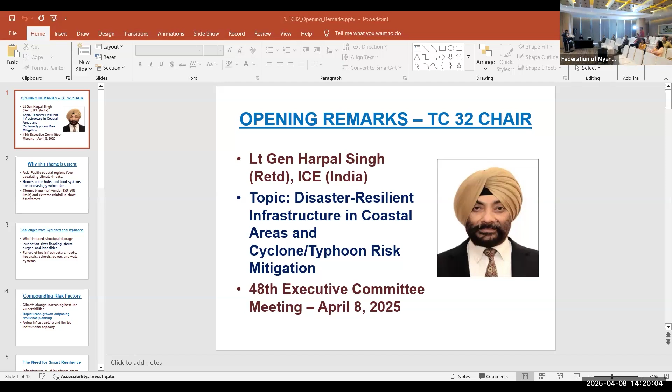I think I'll first invite Professor Murthy, who has already joined us. Sir, have you joined us? Yes, General Sahab, I am in. Hello, General Sahab, can you hear me? Yes sir, I can hear you. Let's start the presentation. Can you see the screen? Yes, we can see your screen.

Thank you. Good afternoon, ladies and gentlemen. A pleasure to be part of this panel discussion related to cyclone resilience. I'm keen to present the highlights of what we need to do differently from what we have been doing all these years. So quickly, today's presentation will be about the double trouble that cyclones offer us, which is both wind and water, then the need for robust standards, and finally we'll talk about the way forward, what we need to do.

But in all this, the backdrop for building resilience in the built environment and thereby in the communities are robust standards and a strong techno-legal regime implementation. These will remain our key watchwords for the way forward.

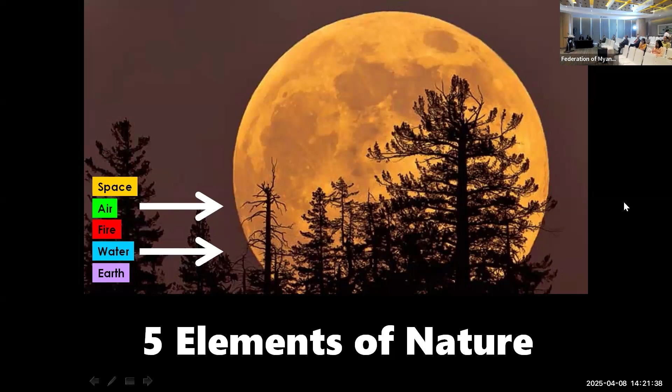First off, let us talk about the double trouble that we have. Nature has 5 elements in it, and cyclone takes the fury of 2 of them simultaneously. Very unusual. Normally in design practice, only one is expected at a time in the design process - that is the assumption made. But cyclone brings a very special combination of wanting to design for 2 simultaneously. And when you look at the loads that appear on the structure, the wind and the water loads, both are force loads, and hence there is a need to build robust standards.

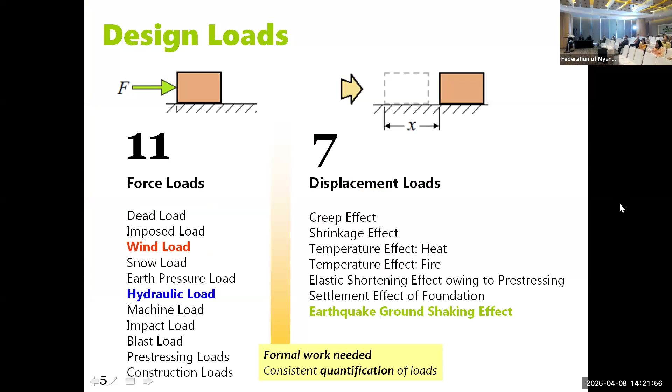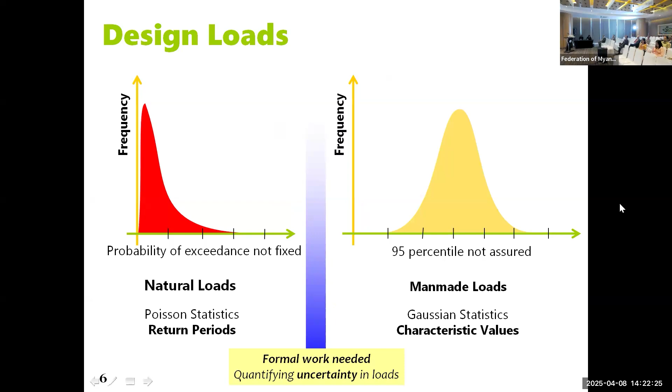I'll explain why these robust standards have to be done. Now, the loads group under natural and man-made loads, and natural hazards are seen to follow Poisson statistics, while man-made hazards follow Gaussian statistics. And hence, in the last couple of decades, we have moved to estimating natural hazards based on return periods and not on characteristic values or Gaussian statistics.

For example, this has been successfully implemented in the case of earthquake design, where we have categorized all our built environment into normal, important, critical, and special structures. Return period forms the basis - the larger the return period, the more severe is the consideration of the force. And that is the approach that we have been taking.

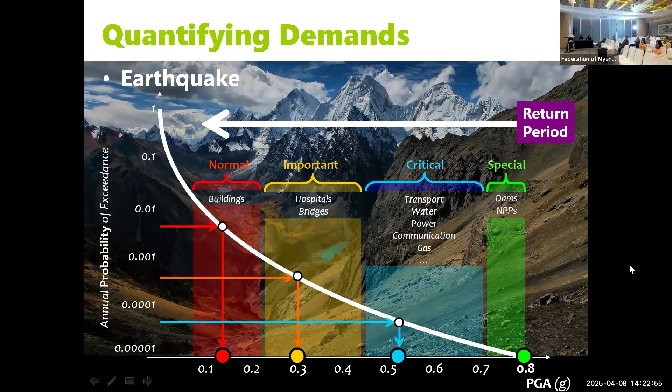It is now time for us to look at the second segment of our discussion today - the robust standards that we have, how do we really create such robust standards? So first off, in the case of flood also, we will need to look at the 4 sets of structures - normal, important, critical, and special - and then look at the flood levels that we need to consider in the design of such structures.

Why is this necessary for us? Because first off, in the existing built environment and also the new one to be added, we need to assess the risk that the built structures are at from the consideration of flood. And hence, we need to move to a probabilistic framework. While some countries have done this successfully, many of us still have not moved to that, because of the lack of data availability in a formal sense.

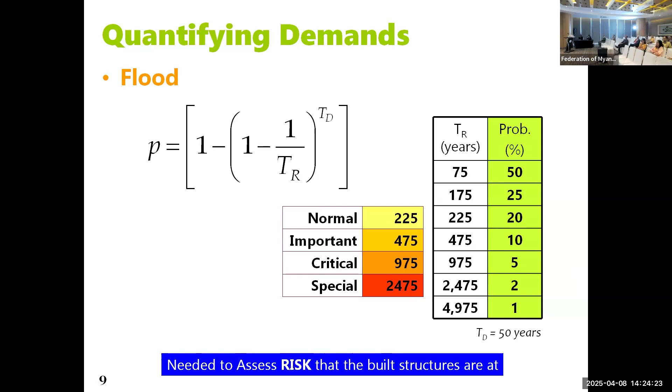Because in the case of flood and wind, we need to worry about local conditions, so this database needs to be maintained consistently. Internationally, the probabilities acceptable for the design of normal, important, critical, special structures range from 20% probability of exceedance in the 50-year design life, to 10, to 5, to 2 years, 2% probability of exceedance. Now, in the case of flood, a new paradigm has come into our discussion - that is climate change.

If you consider climate change, the surprise will be much higher, and hence it is time for us to bring that into the design process.

The increase in the incremental water level as you go from the return periods of 225 years forward is to be examined. In the case of earthquakes, the best available estimate based on paleoseismology and fault movements over past earthquakes has been slated as 2,500 years. But in the case of flood, the best available data is not more than 200 years, and hence that becomes the reference return period, and anything higher than that is actually to be estimated.

Now, we can look at the way we are designing right now and revise that method from mere statistics to a return period approach, and also add a climate change factor on top of that. This would be a simpler method of handling the hazard level as far as flood is concerned.

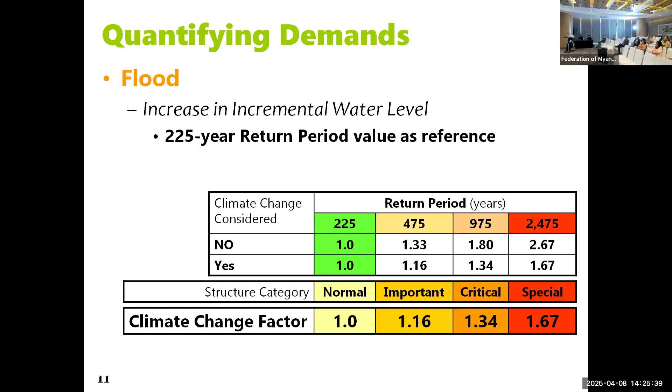Now, when it comes to wind, many countries have also moved to the return period method, but many others are yet to have this step taken. So it is time to again harmonize the wind estimation of the wind forces also under the same return period concept. That's on the demand side.

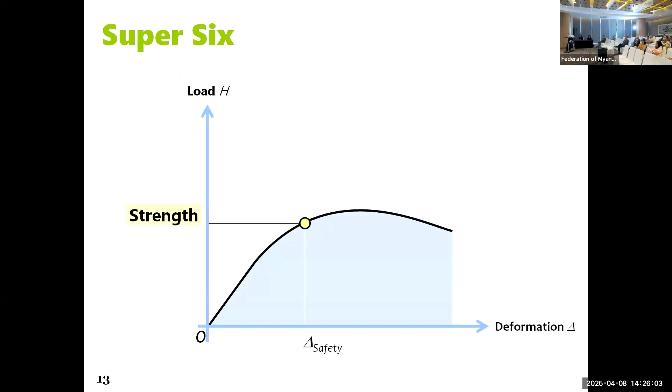On the capacity side, when you design structures, you design normally for strength, and then you have serviceability, durability, robustness, integrity, and restorability as the six limiting states that we have to design for. In sequence, we look at strength design first, serviceability next, durability is considered en route, and then we have robustness, integrity, and restorability in that order.

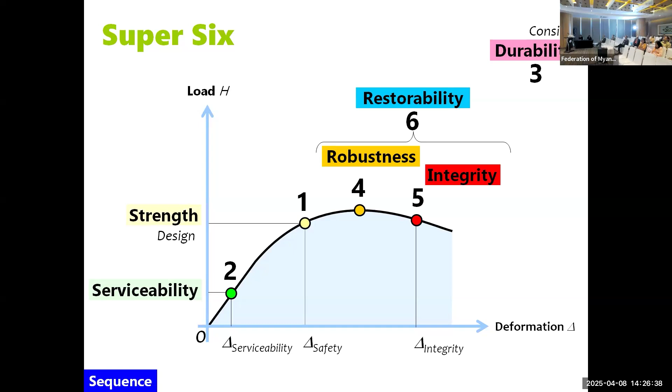Not all structures need to be designed for all six of these, but for sure the first three are mandatory for all structures. So while we design for strength, we will consider durability and check for the others. That is the approach that is taken.

Now, when you look at such a design framework, you notice that as you permit more damage in the structure, you're increasing risk. And as you reduce the damage, you're increasing resilience. And this is where we need to make a departure now.

All these years, we were rather accepting the amount of risk, putting numbers into it and saying this is the level of risk, this is acceptable, and so on. But now I think we need to depart from that, because we can't keep rebuilding all these facilities over and over again, especially in the case of cyclones, where we are looking at annual recurrence.

We need to have resilience built in, which means the design standards have to change now from a risk-based approach to a resilience-based approach. So that's where the robustness of the design standards comes into picture.

When you look at life cost, it might seem like it's going to cost a little more, but when you look at the life cycle cost, even the risk-based design is also going to cost more. There is a kind of an optimum in between that we can start with initially, instead of going whole hog to complete resilience, and then slowly tighten the clauses as we go forward in each 5-year or 3-year window. We can improve the clauses and finally have a destination of complete resilience.

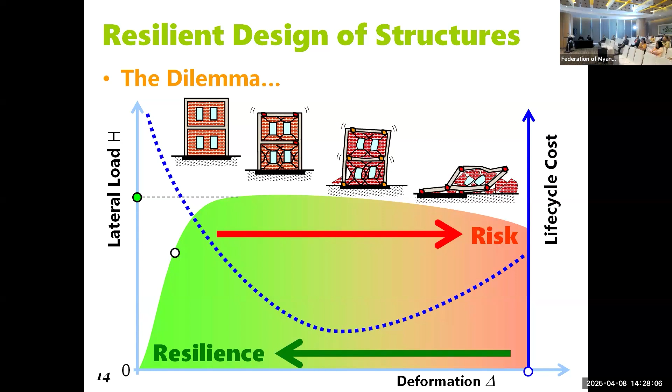This would be my recommendation for the annually recurring loads that we have, like in the case of cyclone. So on one side, the loading standards, we need to improve the hazard estimate by bringing in probability. On the other side, the design standards, we need to improve the robustness by examining the structural capacity and estimating the amount of damage.

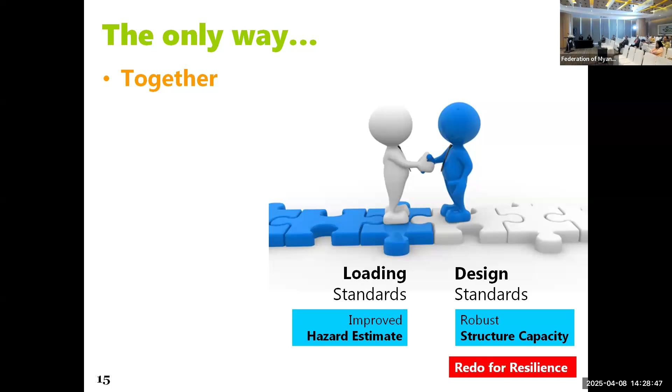That is essential at this point of time if you want to bring back the importance of dignity to mankind in terms of the flooding that is happening regularly. So it is time to redo the design standards to build resilience into that. It's not the same as the risk-based design. And so we need to think together and then create this.

Finally, I would like to say that in the past, we have always been focusing on risk, and we say we have three elements contributing to risk: hazard, vulnerability, and exposure. Hazard, we use science to estimate. Vulnerability, we use engineering to estimate. But exposure is still in the hands of the municipal bodies through the bylaws.

And so structural safety was hinging also on the bylaws that were allowing a lot of freedom to certain structures being developed in vulnerable areas. This is where I think we need to put some pressure on trying to relook at the bylaws, improving the engineering estimates, as well as improving our understanding of the science of cyclones.

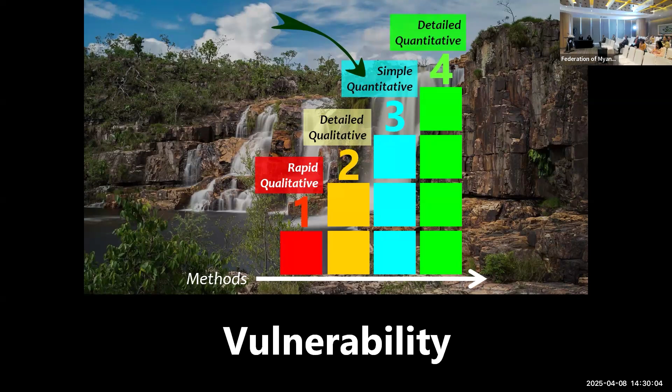On the risk side, vulnerability assessment forms the backbone of risk assessment, and this can be performed at four different levels. The first two are qualitative and the second two are quantitative. It is necessary now for us to move to quantitative assessment and can't survive on qualitative assessments anymore. Vulnerability assessment has to go into bringing out exact numbers and exact deficiencies in structures.

But you would notice that you won't do the entire building stock at all the rigorous level. You will start a telescopic method. You will pass all structures through level 1, low rigor and low time taking, then bring level 2, which is also qualitative, then bring level 3, which is quantitative but simplified, and then bring the detailed quantitative.

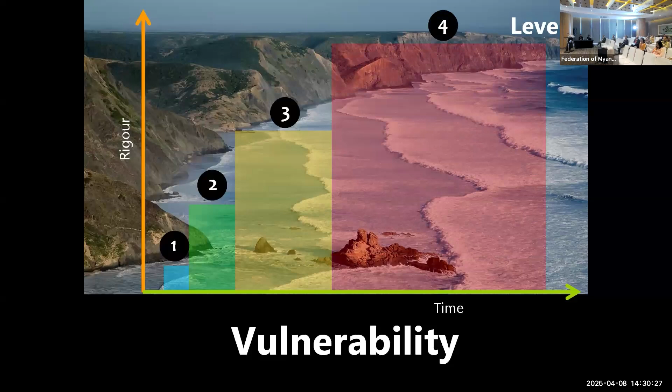It so happens that if you look at the number of structures that will go through this filter, if you start with 5,000 at level 1, finally you'll end up at 5 structures to go to level 4. So it is not so bad when you look at 50 structures to be evaluated quantitatively out of the 5,000 through a logical sequence of filtering. So it seems that the problem may seem large, but it is still doable by the engineering and architecture community worldwide.

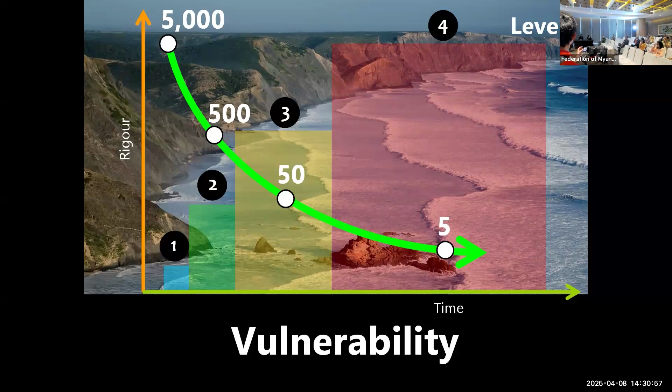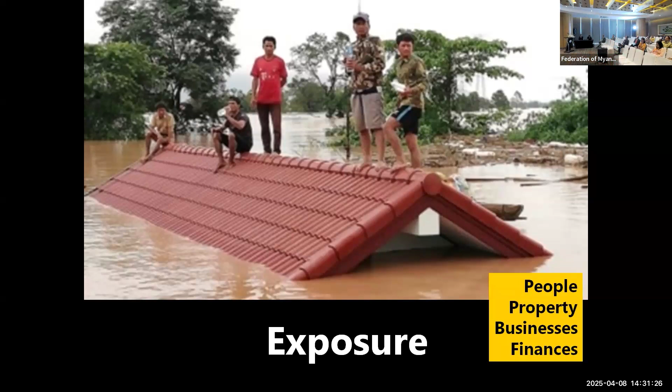But one thing that embarrasses us is when you look at flood, this has been the most painful question: should we allow people to go through this process every year, every time there is a cyclone or every time there is a high flood condition? I think it is time for us to give dignity to mankind. Even though we have been talking about people, property, and business and finances as far as numbers are concerned, I think mankind has to be put higher.

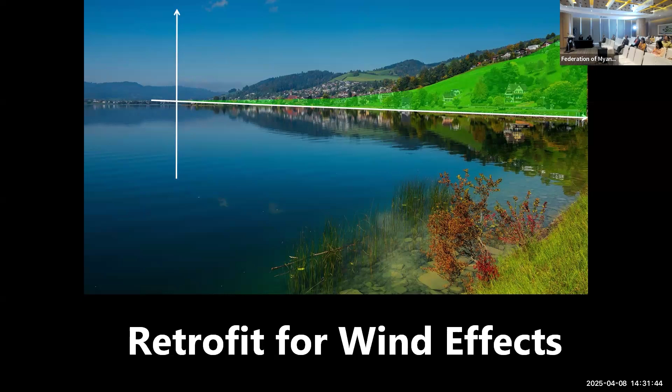Now, out of the two hazards that we have, one is flood and the second one is wind. We notice that retrofit can be done only for wind-related systems. And while all new structures will have to be built with the revised standards, the old structures also, we need to now reduce the number of vulnerable structures and then increase our building stock towards safety rather than leaving them at the unsafe conditions.

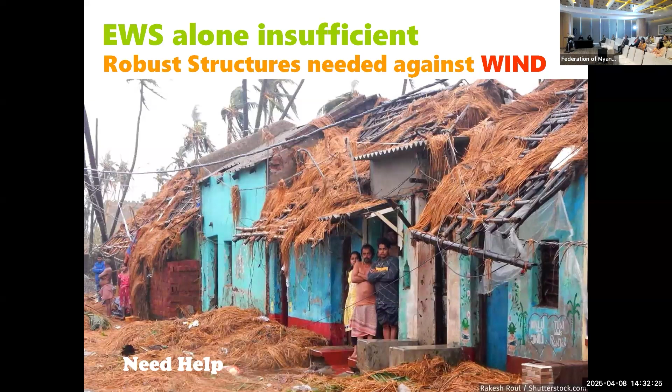So this is a very difficult task. Retrofit is not easy, but I think we have to be systematically doing this through prioritization of our assets into 3 boxes: high risk, medium risk, and low risk. What we notice is robustness of structures is needed against wind. Wind knows nothing other than the fact that is the structure able to resist the level of pressures that it is imposing on structures. If it is not, then I think there's definitely need for help on our structures.

Also, how long will we keep on doing response? And how long will we keep evacuating people? At some point of time, we are clear that the people are not alone, but they are lonely because the technical bodies are not giving them clear statements. I think we need to support governments by giving them very precise statements as to what is doable and what is not doable.

I will close by saying that flood knows only elevation and wind knows only obstruction. As far as flood is concerned, we need to live above that high flood level, and we call this compliant design. And as far as wind is concerned, we need to face it and do the defiant design. Clearly, flood is a planning matter and wind is a structural design matter.

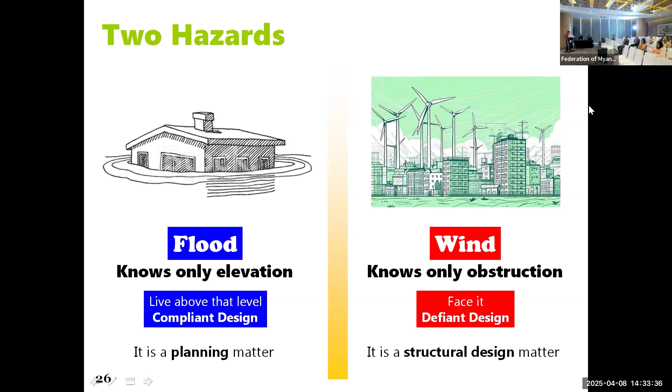So what we need is actually robust standards that we can collectively, through all the membership of the ACECC, coming together and creating with the best practices across the countries, and also get governments to look at some policy matters related to planning, land use planning for the future developments.

So I'll put the strategies in 2 boxes. One is short term. As far as wind is concerned, we need unified good engineering design practice related to the built environment, improve the standards as far as hazard is concerned, make them robust, improve the design part of it, where especially when we look at resilience, it is not possible for us to now admit so much of damage in our structures. And so for wind particularly, the structural configuration of structures also makes a big difference.

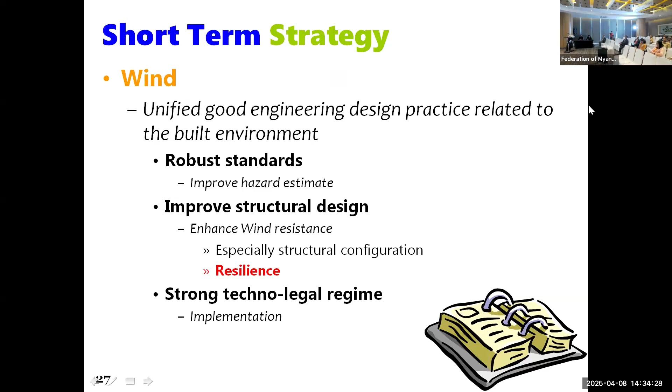Very clearly, where we are falling short in many countries is actually strong techno-legal regime. We are not implementing the standards that we are creating. Even whatever is available, we are not implementing. And that is why we are jeopardizing a lot of people living in low-lying areas and living in structures that are vulnerable to wind action.

On the flood side, the focus should be on mitigation and not on preparedness and response. As far as mitigation is concerned, we need land use planning, and we need to, in the long run, move people out of the low-lying areas because water knows nothing other than elevation.

On the other side, we will have to painfully go through the process of preparedness and response because we have a large stock of buildings and structures in low-lying areas. So we need to forecast, we need to do early warning, and we need to do evacuation.

But all this is out of compulsion. This is not the solution in the long run. The solution will remain only on the mitigation side. This is where I think a strong policy is required. We need to help governments understand the importance of bringing back dignity to mankind by giving them an advantage.

So it's very clear to us that there are a number of countries which have very good practices, and we want to borrow all those good practices and put together a considered document which can become a model document for countries to adopt and adapt and even customize it to their conditions.

But it is time that a body like the ACECC comes together and creates this necessary backdrop. It's not time to watch anymore, it's time to get into action. With about 20 people on the floor in the stadium and 20,000 watching them, I think we need to reverse it. Only the elderly should be watching. All of us should be continuing to play the game.

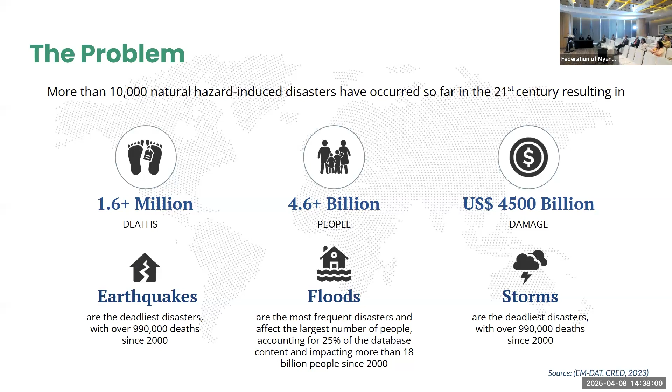Although Nepal is not that much affected by coastal problems, we do have a number of hazards posing significant risk, and we are all aware about the natural hazard induced disasters that have been severely affecting us, so I won't go much into this. Besides, if I have to talk about the floodings in Nepal, if you look at the 50 years average of data, you get to see that on average there is at least 83 deaths per year. This is based on our historical data, and it's not just about the lives, but also the damages and losses in different sectors that we have been continuously facing.

Apart from that, one of the specialities of Nepal is the complex geography. If you look at the elevation difference of Nepal, the Tarai, the southern part of the country, is around 60 meters of elevation, whereas the topmost northern part is almost up to 8,848.86 meters. So within just a variation of 200 kilometers of aerial distance between the northern and southern parts, the elevation varies by a big number. Besides, the complex geology and other problems have also been resulting in this kind of issues.

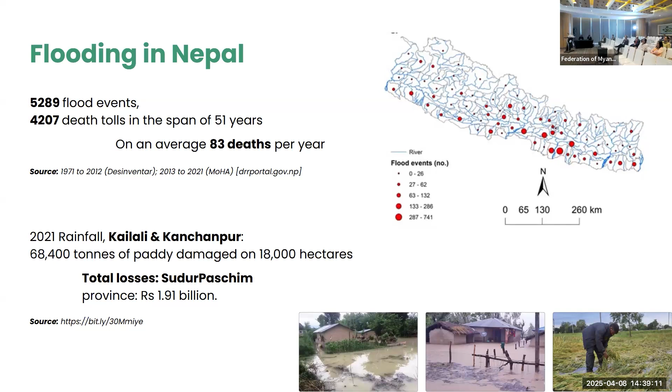And regarding the floods, I already shared this. So what's the problem we are facing right at this moment? People often call it a lack of data, but it is not just the data, but also the approaches we have been following, and also regarding some of the work that is more focused on response rather than being very proactive, investing in mitigation and also preparedness.

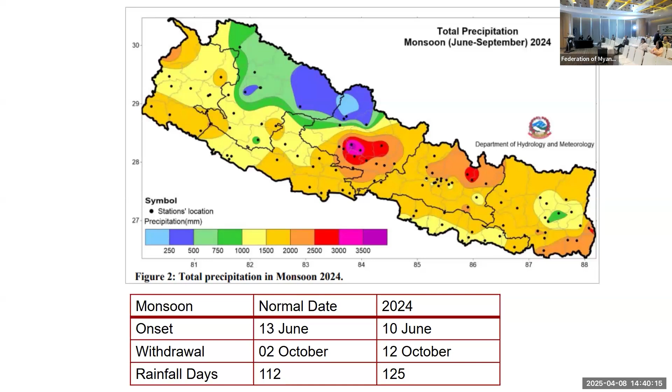Today I'll be talking about one of the case studies from the far western part of the country. It was kind of 5 days before my wedding when I was set to leave, but then because of this emergency, I had to return back to work regardless of my wedding ceremony.

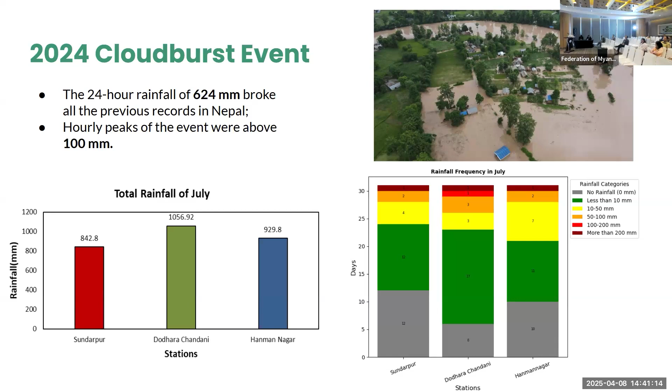Between July 7 and July 8, for a period of around 24 hours, there was almost 624 millimeters of rainfall. If you look at the rainfall of July month in that region, the total monthly rainfall was around 1056 millimeters, but on just one day it was around 624 millimeters. This speaks to the massive amount of rainfall, which happened because of the interaction between the monsoon rain that comes from the Bay of Bengal and also some western disturbances. So there was a local system that resulted in this kind of 624 millimeters of rainfall.

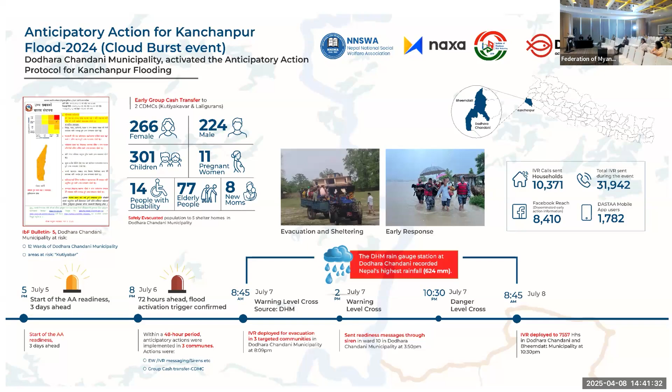Today I will be sharing how we were able to evacuate 266 female and 224 male prior to this event, though we had very little lead time, and also some of the strategies that we adopted during this monsoon. So how we intervened is first through our technologies.

The region I'm presenting is transboundary in nature - only 35% of the catchment area lies in Nepal, whereas 65% of the area lies in India. So there are some limitations in data, but based on the available data and under different return period scenarios, we identified what areas could have some kind of inundation. So we developed a model.

Household surveys were also carried out, and the house typology, vulnerability components, and exposure were explored. Based on that, we categorized the households by overlaying the layers of hazards, vulnerability, and exposure, and identified the households which had persons with disability or other vulnerable people. That kind of information was already available with the municipality, and we had this visualization available in the municipality.

Because we lacked data, we also developed an inundation model, and then we checked it with the historical inundation that happened in the past. So this is how we validated our models.

For quick response - not just response, but for early action and early evacuation - we had community-led plaques in households, where households with severe vulnerability were provided with such plaques and information.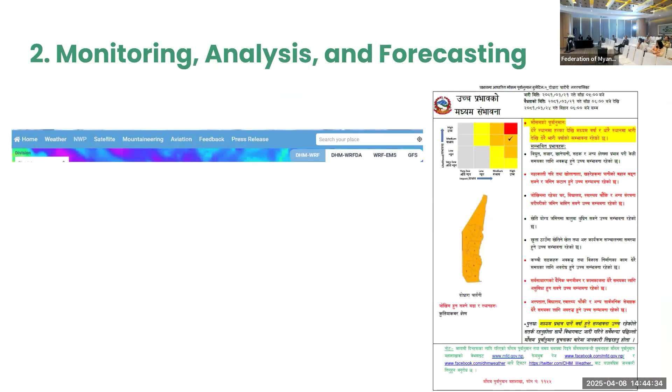We also worked with the Department of Hydrology and Meteorology, doing a piloting of impact-based weather forecasting this year. Before that cloudburst event, about 2 days prior, we were provided with this IBF bulletin that suggested there could be severe problems. That's how we started working in the field.

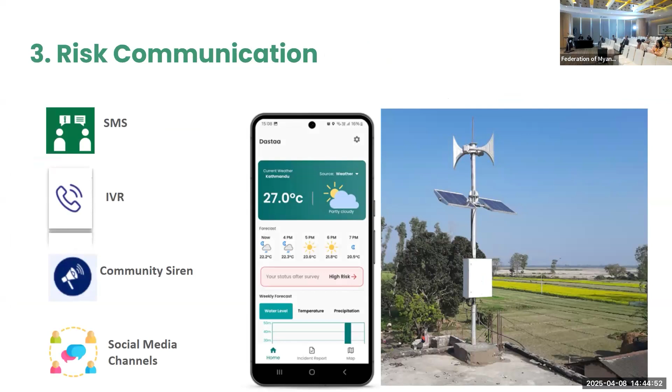With the help of SMS, IVRs, community sirens, and social media channels, we communicated with all households to keep them in safer areas. We also have community disaster management committees.

During this period, we sent many IVR messages to their phones to check on their conditions, whether they had already evacuated or not, and also to notify people in advance.

And besides, we also developed youth groups who were very active and contributed in the overall disaster risk reduction cycle. Some of the youths were trained on what kind of interventions they need to do. The early actions included evacuations, group cash transfers to facilitate persons who evacuated to shelter homes, and also cash voucher assistance.

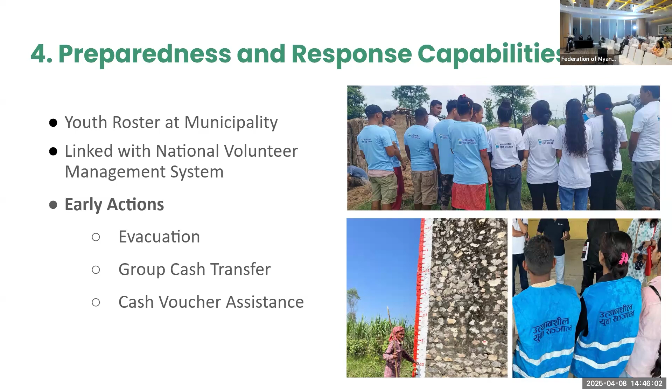Besides, we also promoted some community-based mechanisms. The staff gauges painted on different structures were also made available to the communities. The municipality also developed early action protocols, so whenever there is likelihood of a potential event, those protocols are activated, and all stakeholders are assigned their designated roles and responsibilities. Before any such event happens, people would take early action to reduce casualties or other losses.

After the floods, our volunteers also went to different areas, and based on the inundation level and damages that occurred in the region, we are currently developing a depth-damage curve for this region, and also developing a physical vulnerability curve.

Besides that, the community was also really proactive, and they used to send us any kind of incidents that occurred in the region. For instance, if there were disturbances on the road or a bridge had collapsed, they would send that data to the municipality for proactive response. This is how the community also worked hand in hand.

Together we worked on the four pillars of early warning systems: disaster risk knowledge, disaster warning dissemination, preparedness and response, and observations. Overall, what I want to share is that because of these interventions, everything was linked together.

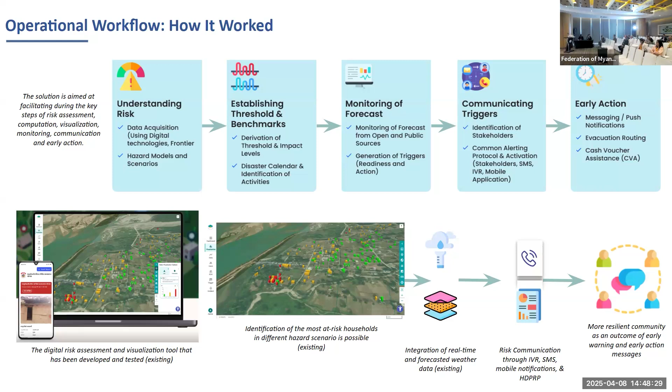And thus, despite having around 1,300 lives lost during 1993, for this year 2024, especially in Dodhara Chandani, because we were able to apply these interventions, there were no casualties.

So there are a few lessons learned that we gathered during this implementation process. The most important part is transboundary collaboration, because disasters do not just look after administrative boundaries. And what is also very essential is...

We are kind of living in risk, so we are actually adapting to the situations. There are instances where we can also apply mitigation, but there is a term called residual risk. Despite all the interventions we do, and because of resource constraints, everything is not possible, so residual risk actually remains.

It is our duty to make this residual risk as minimum as possible. It is also very important to work on preparedness, as identified in all the cycles we undergo during our early warning system implementation. The availability of very granular level information will be very important for the government and other stakeholders to carry out interventions prior to disaster.

While implementing this project, we were also awarded grants available from GSMA and ADPC, and we are working with stakeholders under the leadership of the local government.

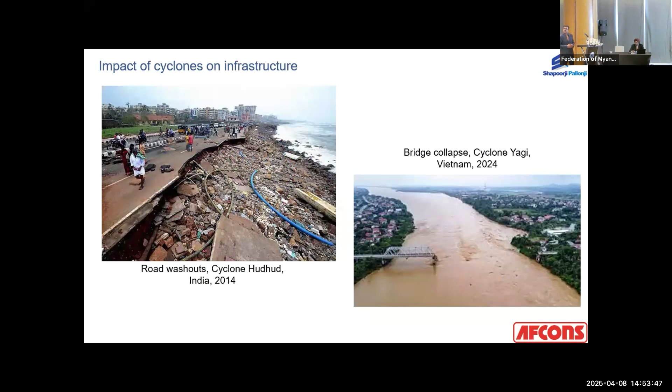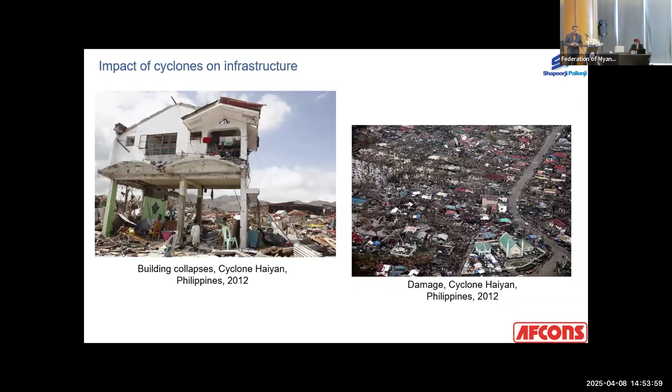The cyclones have a catastrophic effect on the area. It leads to failure of roads, collapse of bridges, collapse of buildings, and leaves a trail of destruction in the entire area where the cyclone hits. Of course, there are many structures which have stood the test of time, and in spite of experiencing many cyclones, have stood tall without any major damage.

We all know that if we want a structure resilient to cyclones, we need to take very good consideration of the wind loading. The design needs to be very aerodynamic, the foundations need to be very robust, there has to be some amount of redundancy in the structural design, and we need very good material for construction.

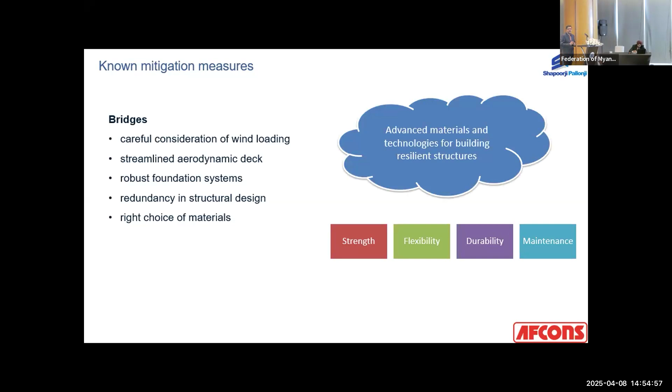Since my topic is about material, I'll throw some light on the use of advanced materials and technology for building resilient structures, with focus on achieving high strength, high flexibility where required, high durability, and low maintenance.

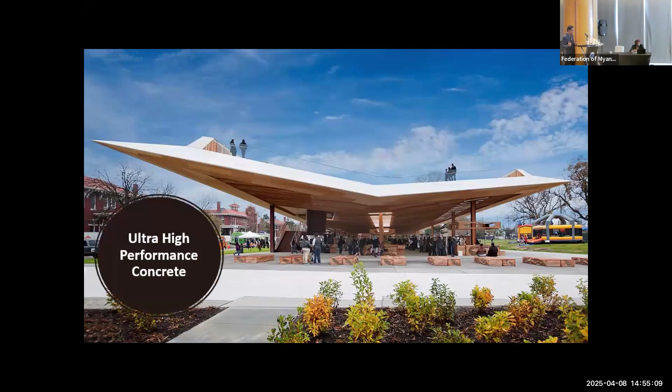One of the most promising technologies is the use of ultra high performance concrete. This concrete not only has very high compressive strength, but also very high flexural strength, very high modulus of elasticity, and very high fracture energy due to uniform distribution of micro steel fibers added into the concrete. The water cement ratios are very low, so permeability is low and durability is very high.

Because of the ultra high strength, the members are very slender, giving a very aerodynamic design. You also have lower dead load, and the structure is very ductile and has very high impact resistance.

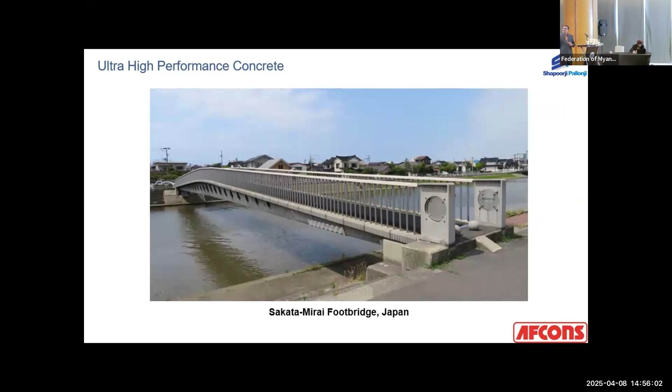This is one of the projects where ultra high performance concrete was used early on. You can see that the members are very slender, and the shape is very aerodynamic.

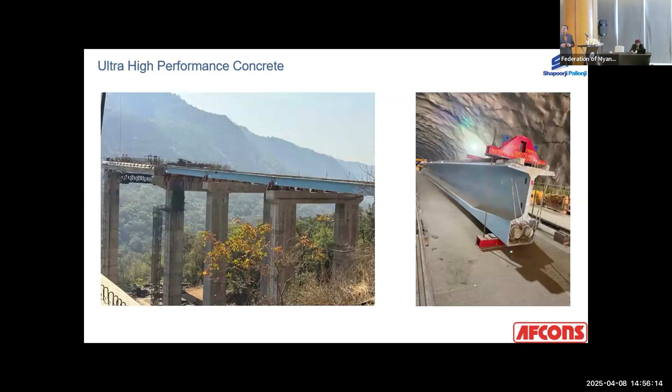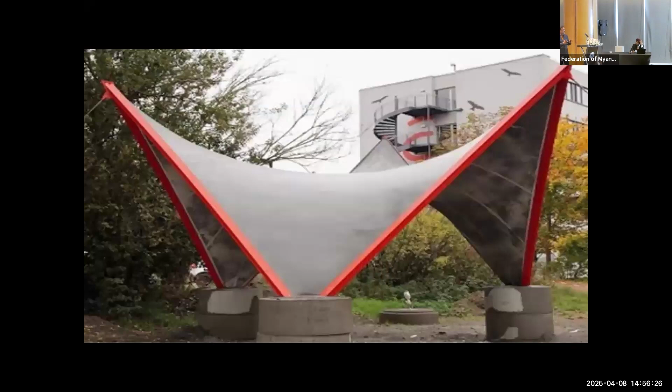Having looked at the concrete technology with very high strength, let us now look at something very flexible, called bendable concrete. Bendable concrete has got very high utility in areas where structures experience high deflection, such as in earthquake and cyclone-prone areas. This concrete can have good utility in place of conventional expansion joints; you can use bendable concrete as a replacement. The bendability comes from using polyvinyl alcohol fibers.

We all know that conventional expansion joints can rust, and if not maintained properly, will not function with optimum life cycle. This can cause additional stresses to develop in the structure. We can use bendable concrete as a replacement for the conventional expansion joint, allowing it to expand and contract across the requirement without requiring major maintenance.

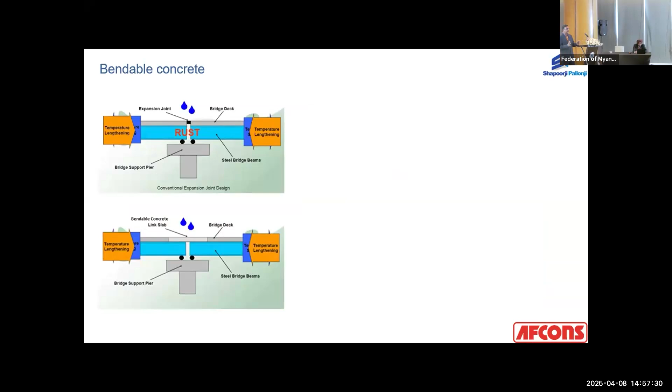The Mihara bridge in Hokkaido, Japan is one such project that was built using bendable concrete instead of conventional expansion joints.

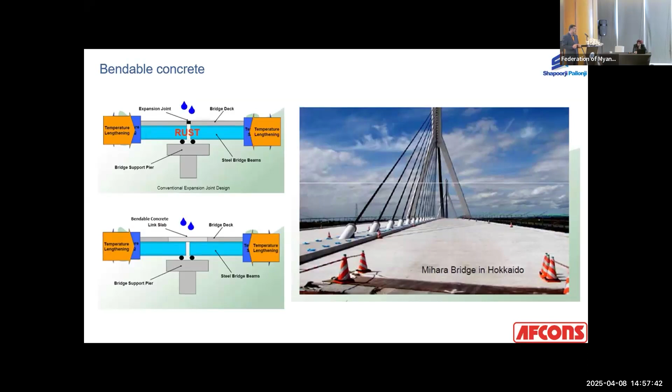We know that when a structure undergoes high deflection, it develops a lot of microcracks. These microcracks are not visible to the naked eye. Over a period of time, they widen, become visible, and then some action for repair is taken.

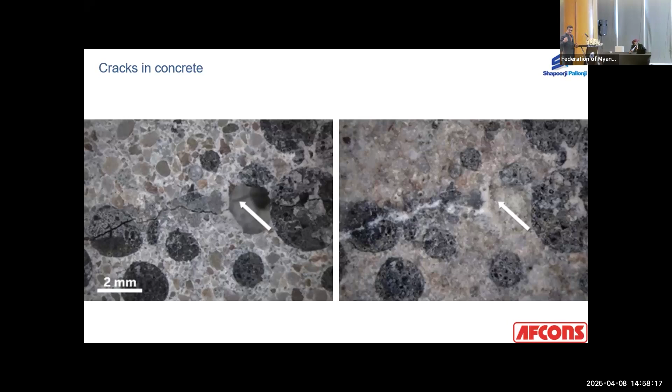Imagine if we have concrete technology, a mechanism by which the minute these microcracks develop, you are able to heal them by some mechanism. If that happens, then the deterioration to the concrete is going to be very low, and the service life of the structure is very high.

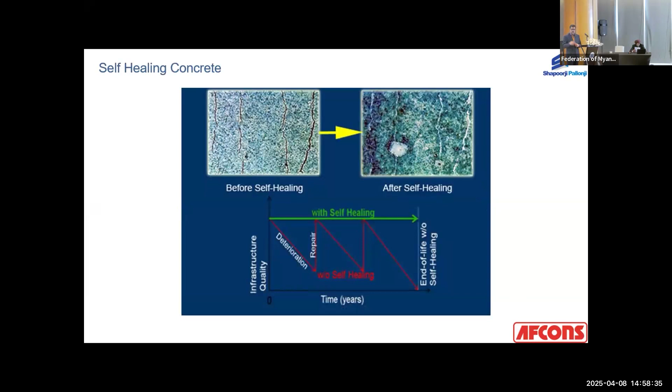There are a couple of ways by which this self-healing mechanism can be built. One is a lot of research going on the use of bacterial concrete. This is a certain kind of bacteria incorporated into the concrete at the time of production, and it remains dormant in the concrete as long as the structure exists.

The minute any micro cracks develop and water gets into it, these bacteria get activated and in the presence of water and oxygen, they produce calcium carbonate, thereby filling the crack at the micro level and reducing deterioration. The other way of achieving self-healing is by using crystalline-based powder.

These not only grow crystals in the pores, capillaries, and microcracks, but also reduce the permeability, thereby increasing the durability of the structure. It acts as self-healing in the water proofing process as well.

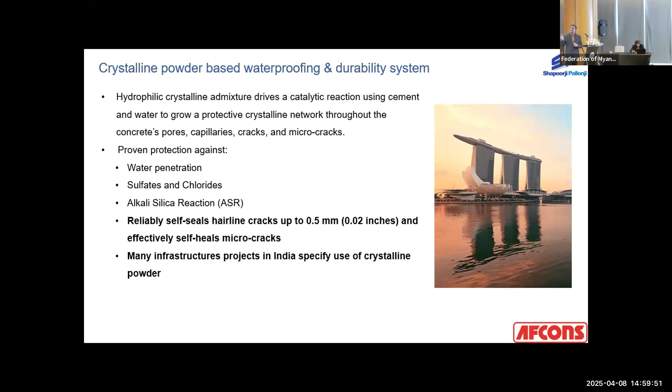Apart from making good concrete, it is also very important that we design the structure in such a way that the rate of corrosion of the reinforcement is controlled. This is especially important in case of RCC.

Similarly, when we compact it, the excess water tries to move out. There is no way to go, so it stays there in the cover zone. Now our cover zone was the first line of defense. If the air provides carbon dioxide into the concrete, this will affect the corrosion.

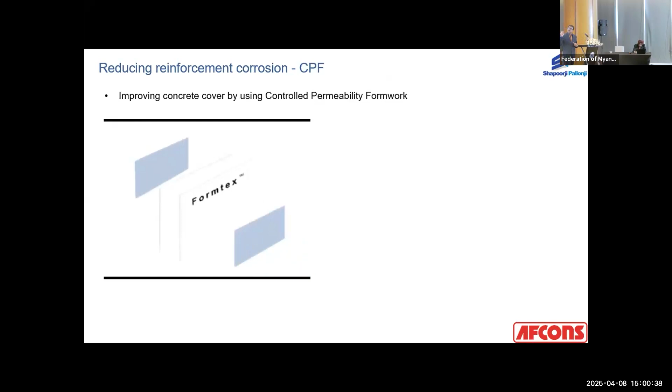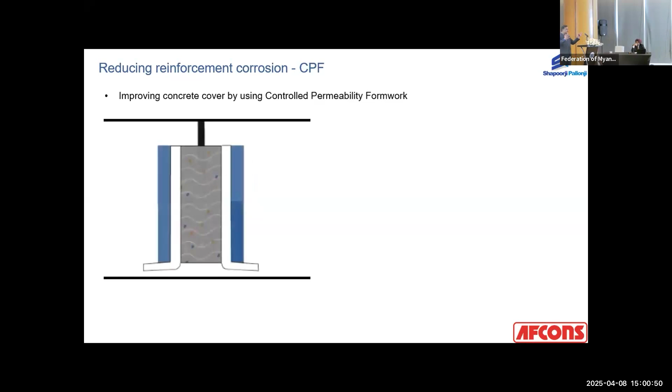Now we have something called controlled permeability formwork, which works like a filter. When the excess water is expelled towards the surface, it drains down, improving the quality of your cover zone and increasing the durability of your concrete.

Eventually, a new generation powder-based corrosion inhibitor has come up and now it is much more effective, especially used in metro projects.

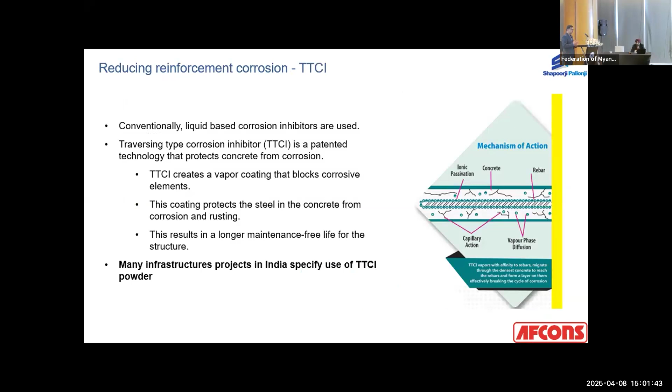A very good structural health monitoring is also important. Maybe once in 1 year or 3 years, depending upon the criticality, the engineer will go and manually check the structure. Nowadays, there are many good sensors which are available.

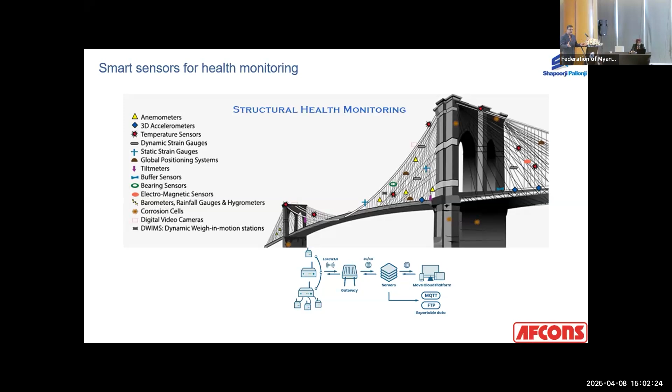You can check these things like strain and crack detection using IoT, which can immediately relate the information down to the user. One can have real-time information about the health of the structure at any given point of time and can take corrective action as well.

Of course, the futuristic idea would be to have self-sensing functions for the structure. A lot of research is going on this, using carbon fibers in this form. It produces a kind of electrical impulse, and they can very minutely check any changes, quickly relating the information to the engineer who will be able to respond.

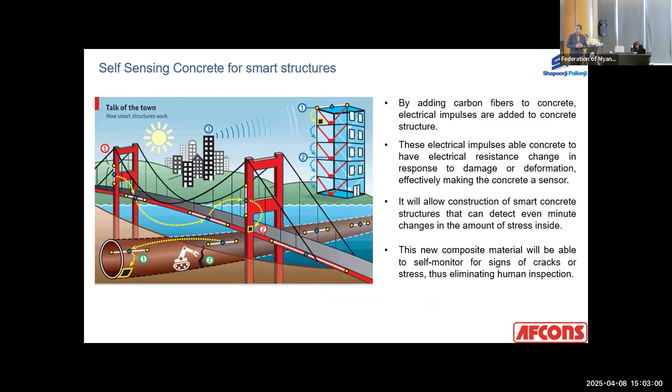Talking of technology, AI can be used a lot. We understand that for any physical structure in a cyclone-prone area, wind engineering analysis is a part of the design, generally done using calculation methods.

Now it has been shown that engineers can go for many more data-driven approaches, and AI can also help predict future cyclone case data.

For the future, these structures must be built with some amount of additional factor of safety, to be future-proof, and we need to update our codes and standards frequently to incorporate the latest technology.

After every major cyclone, we need to carry out assessments, and we also need temporary measures for cyclone preparedness.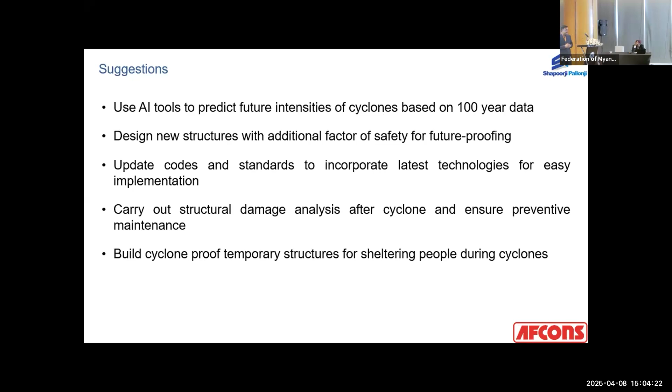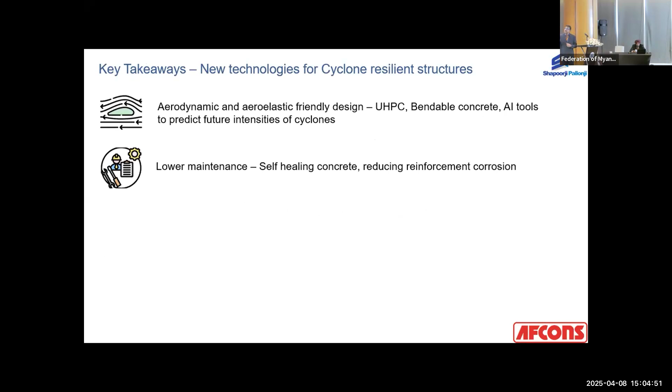Having discussed these few technologies, let us see how we can build a cyclone-resilient structure. We need to have an aerodynamic design using ultra high performance bendable concrete. We need to have lower maintenance for our structure, using technology like self-healing concrete and corrosion inhibitors.

Something else we need after every cyclone is monitoring, it's not something we can just do once. We must not forget the maintenance needs of every structure that we build.

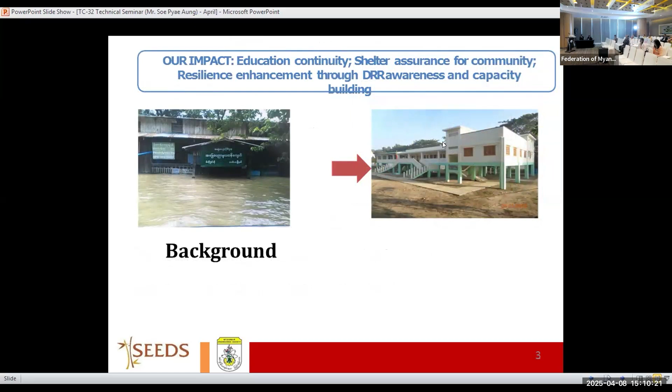According to our project with CECC and the Myanmar Engineering Society, we have a plan for some schools to be constructed in this area. Why are we trying to engage in this kind of project?

Actually, we had a coastal community resilience index survey in my country, a joint project together with Yangon Technological University, the Disaster Management Department, CECC and MES. According to this survey, we noticed this area is very affected by flood and cyclone, so we are thinking of a school construction project in this area.

After that, we started this project in 2018, because according to historical hazards in the Ayeyarwady delta region, they have so many floods and cyclones due to many kinds of hazards in this area. So we are trying to achieve more sustainable development in this project.

Actually, we are working in Myanmar on emergency relief processes, capacity building for disaster risk reduction, community and school-based disaster risk reduction, and disaster management research. From this framework, we are working together with the Myanmar Engineering Society and CECC Japan to enhance capacity building for disaster risk reduction and environment in the affected area.

This project has some objectives, because during disaster time children find it very difficult to continue their education, so how can we enhance education in the community? Second, there is no disaster management plan or disaster management culture in this region, so we want to motivate and enhance disaster preparedness and mitigation measures. Especially, they have no action plan, so we are trying to create an action plan, because without any kind of awareness or capacity building for disaster reduction it is very difficult. So we are trying to enhance resilience through disaster awareness for schools and communities.

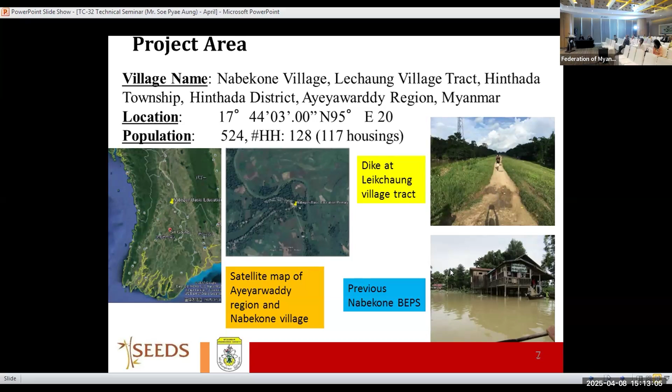According to the map, this area in the rainy season always has flooding more than 3 meters. You can see there is one of the Ayeyarwaddy dikes, and this dike is nearly more than 200 miles.

There are so many historical hazards for flooding and cyclone in this area. So we are choosing this area for a more resilient community and school construction project.

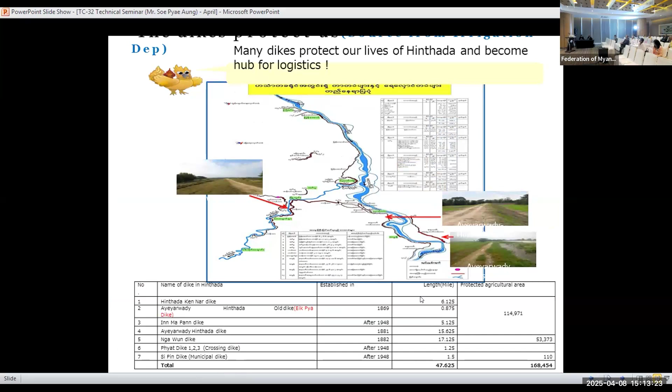You can see there are 3 main issues with the previous schools. The first issue is there are very few facilities for the children.

Second, even though they have a school, during the rainy season and disaster time they cannot attend their schools, and they have great difficulty with their education in the community. The third issue is that even though they have a disaster, there is no evacuation center like a school construction.

So we are thinking about how to enhance and solve these kinds of problems. There is their hazard profile in their village.

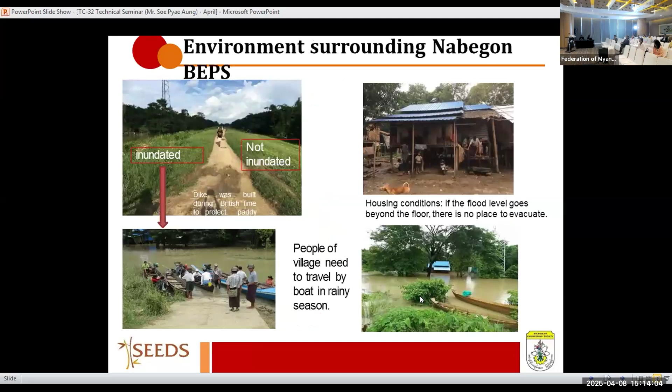So it is a major contribution to the community-based disaster preparedness and response strategy. In my presentation, I would like to mention 4 topics.

The first one is community involvement in disaster preparedness. Second is a community timeline for disaster preparedness and response. The third is how to integrate local indigenous knowledge with science-based knowledge. The last one is enhancement of training for capacity building for disaster risk reduction in the area. So that is the main objective of this topic.

Because community participation in disaster management is very important, we have been trying to establish a framework for community-based disaster reduction.

Second, before the framework, we dig into what are their hazards, what kinds of vulnerability, what is their resources and capacity, and some evaluation methods. Third, we analyze and develop a community-based disaster management plan.

So there is our process for hazards, vulnerability and capacity analysis. First, all the villagers and our project members try to understand the historical hazards, then clarify and identify the vulnerability assessment.

The last part is identifying what kinds of capacity assessment already exist in their region, and how we integrate this into our project.

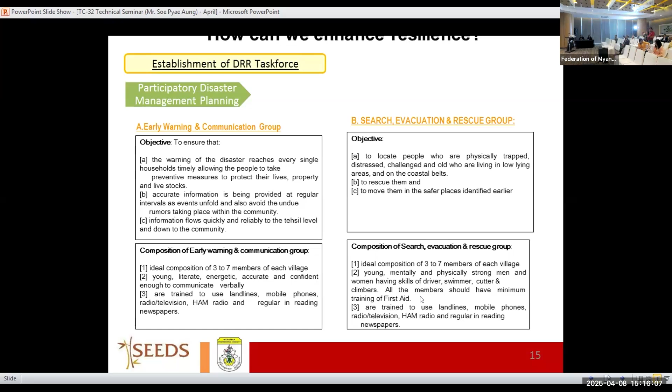We have so many projects because this is a 2-year project. So there is a community disaster management plan, and you can see there are different kinds of committees.

The first is like an early warning committee. Second is a search and rescue committee. The third is a disaster management committee for first aid and primary healthcare facility. Next is a disaster rehabilitation and response committee. Then a training committee, and the last is a financial support committee. So we organize these kinds of disaster management structures in their region.

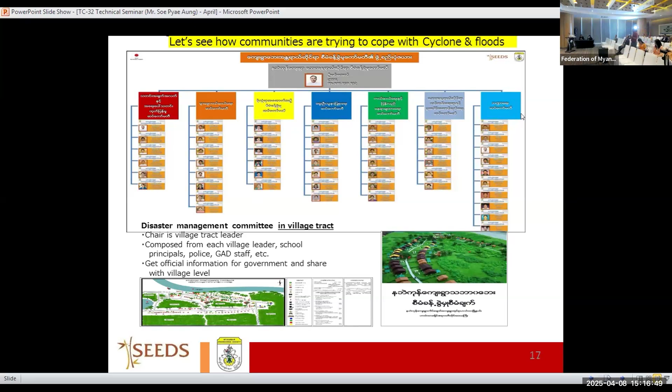For this activity, because they don't know exactly what the risk is, what the disaster is, what the hazards are, or what the vulnerability is, we try to integrate this into their education curriculum, especially targeting teachers, community people, and students.

So we are trying to carry out that kind of planning through discussion. First, we establish the disaster management committee. After that, we collect people for enhancing capacity building through different kinds of training.

When arranging different kinds of training, we collaborate with departments like fire safety, disaster management, and irrigation, because we are trying to provide not only our own capacity training for them, but also to involve different kinds of stakeholders in our country.

After that, we try to take some kind of timeline, because in this area they are a flooding area. So we have four scenarios. The first one is an emergency preparation state. Second one is emergency state 1, which is a danger level of flooding at 44 feet.

The third one is an early warning system. At this time, they can get warnings from the Department of Meteorology, Hydrology, and the Education Department. The last one is an emergency state for alert level. So according to the framework, we are thinking for each level, what kinds of activity they need to do.

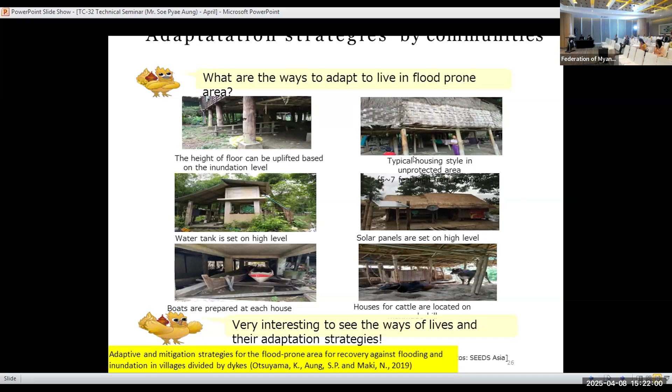In our society and CECC project, we also support early warning and recording equipment, like atmospheric pressure, temperature, and humidity sensors. That kind of machine is also very useful for them.

They always record the flood height level, and during school time, they already record it and listen for information from the government, especially from the Department of Meteorology and Hydrology. They also have water level recordings from the Department of Meteorology and Hydrology.

So there is existing knowledge. We combine scientific knowledge with their local knowledge.

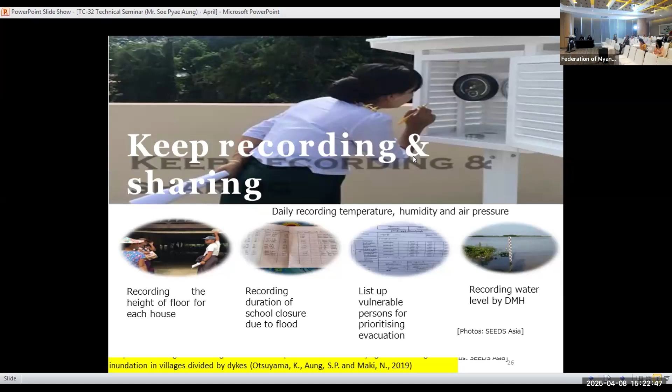And then they have planning for the disaster management plan, including a firefighting course and some time management systems. In October, they attend training for disaster management. They also need to understand humanitarian standards and the SPHERE project, because when a disaster comes, they must know how to provide emergency response. So we have different kinds of training in our project.

So we arrange for some kinds of disaster sharing knowledge, together with the education department and some disaster management training center. This means community people can learn not only theoretical knowledge, but also practical knowledge with different stakeholders.

So you can see there is some of the training activity. After our school construction project finished, we also tried an evacuation drill. By doing that kind of drill, they more understand about the process of disaster and how to participate in emergency response.

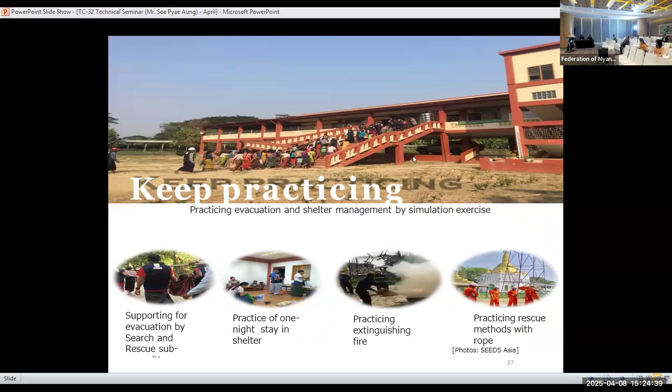There is some of our school construction activity. So we are sharing some disaster reduction activity, as well as some activity in line with the Sustainable Development Goals.

So it is my final slide. I would like to give recommendations for some of the activity in my project. Even though this school is now more of an education community, they need more collaboration among school and community. After our project finished, they have not had so much activity.

But they have a school disaster management plan and village disaster management plan. During the flooding time in 2021 and 2022, they were well managed, but they still need to understand about ownership and inclusion there.

Because the activity in the project itself can be an ongoing process, but without support from projects like the Federation of Myanmar Engineering Society or CECC, our Japan project, we cannot continue supporting. So they need to understand how to continually develop for their future curriculum.